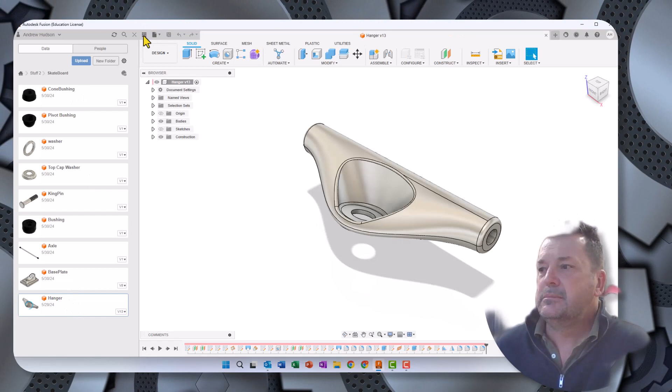Alright, so you can see we've got quite a few things going on here. There's lots of fillets, we've got a loft going on, we've got a rib going down there with fillets on that rib. So there's a fair bit of work going on.

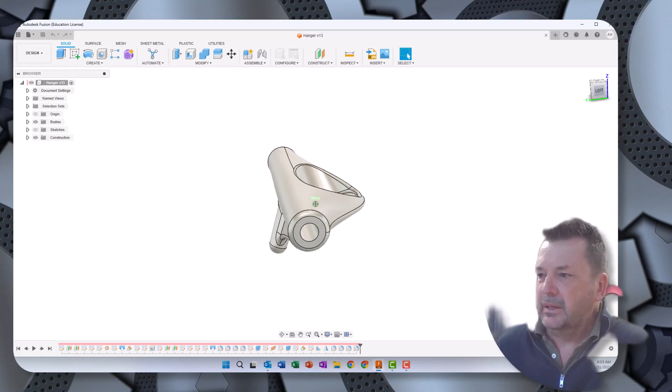Alright, let's see if we can break this down a little bit. Hopefully I've got this right - I actually haven't tested this in the other parts, but hopefully we've got it right.

Alright, so let's wind back the clock to the start of the timeline. First thing was to produce a sketch.

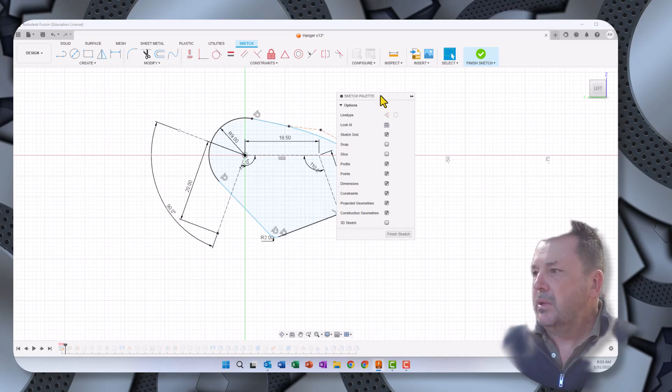So our sketch looks like that. I did that on the YZ plane - I'm not sure whether that really matters, but we'll go from that.

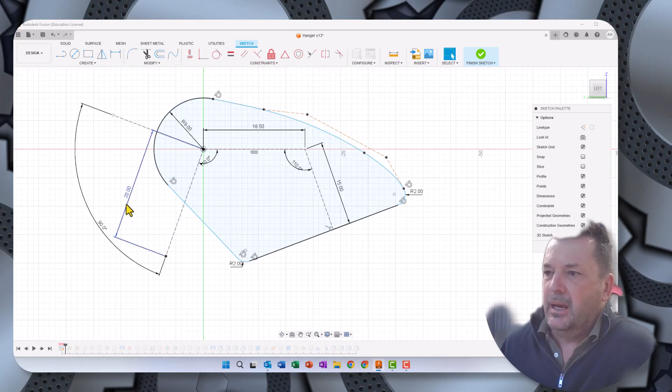Again trying to use your origin point as a reference here, we've got what's called a construction line, which you can pick up over on the sketch palette. So construction line up from the origin point - it's 20 millimeters long, with an angle of 110 between that one and a horizontal line at 18.5. Another one on an angle that's 15 long at 110, so you can place your angles in there. So draw those 3 lines to start with.

From those we've then got a circle that we've put out here. The circle has a diameter of 18, or a radius of 9.

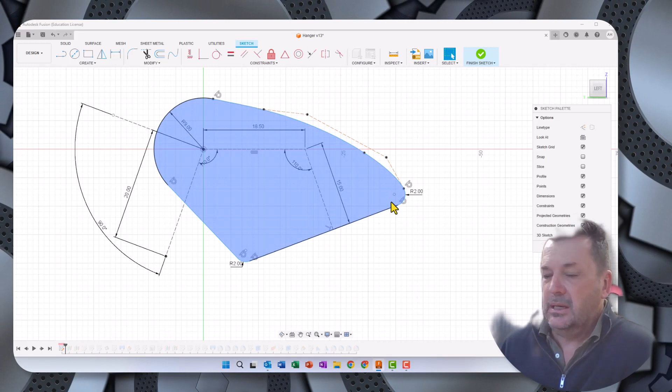We've done a spline going from that across to a point out here, which was just a start point. We've got a radius out there of 2, so you could put a circle out there with a diameter of 4, and then a tangent off that.

So these are tangent constraints here, so tangents off of those. That line there is just perpendicular to the edge of that line, so you can just draw a rough line that's going across - there's no measurement on there.

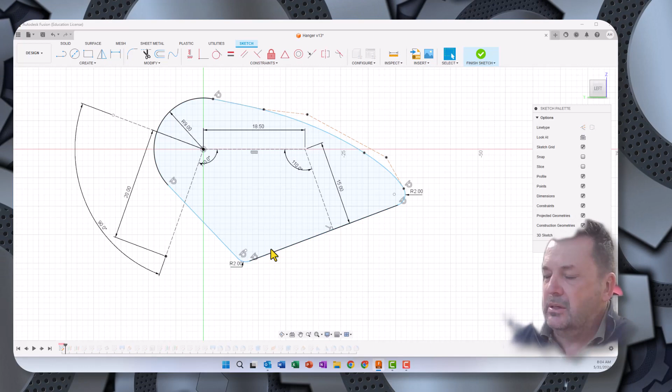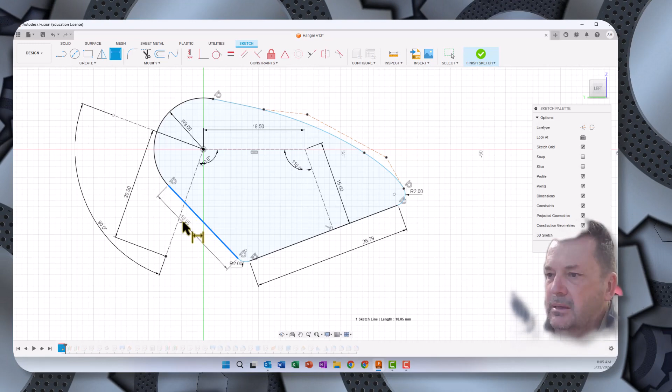We can put one on there, see what it looks like - so it's about 28.79, just perpendicular to this line here. Originally this line here was also just a straight up line, and these corners were a hard corner, and then we would just put the fillets in afterwards.

So pop those in there, again tangents on those, and go from there. Alright, once we've done our sketch, I'm going to go finish sketch and move to our next stage.

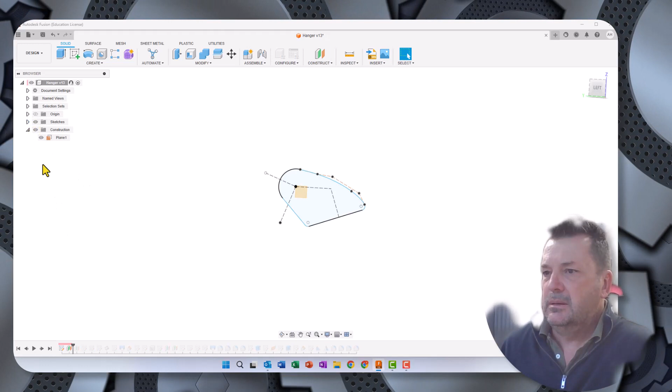We're going to add in a work plane, so this should be plane 1. And I'll put those in there. Let's see - so that work plane is off to the side, you can see it's off.

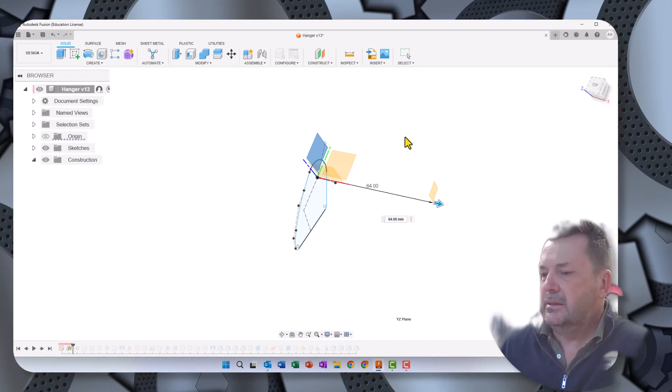It's still on the YZ, but it's an offset plane, so we've gone to construct offset plane and we've offset that. The distance that we've done our offset plane, if I go to edit feature, is 64 millimeters, and then we're going to do one again 64 millimeters on the other side.

So you should have 2 now, 1 and 2, and on those planes they're going to be the ends of those trucks where the axles are going to go in. So that's the 2 endpoints there, and we're going to eventually loft between these 3 sketches. So there's 2 more sketches to come. If we turn this sketch here on, whoops.

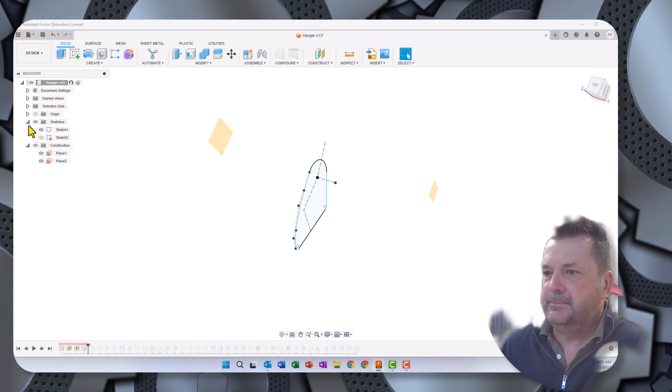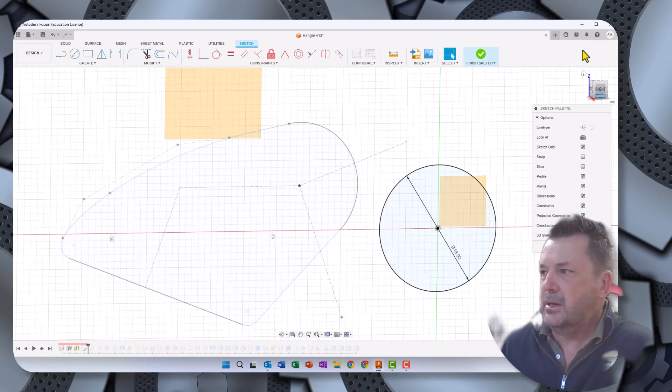So we've drawn a sketch on there. Let's have a quick look - that's an 18 millimeter circle, and you can see the center point of that circle lines up with the center point we did in the original middle sketch. So that point lines up with that point, and that'll also line up with the one on this side. So 18 mil circle on that one, and we're going to do the same on the next plane over. That now gives us 3 sketches to look at.

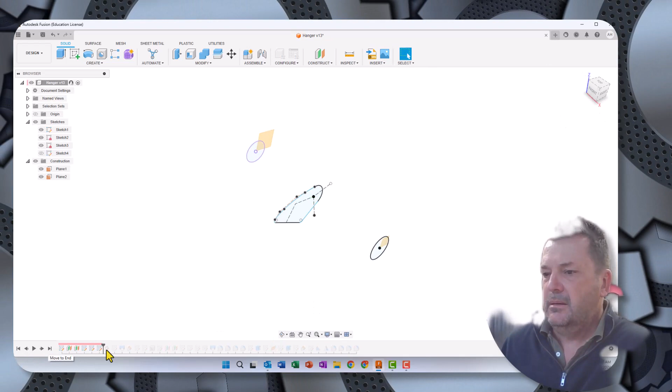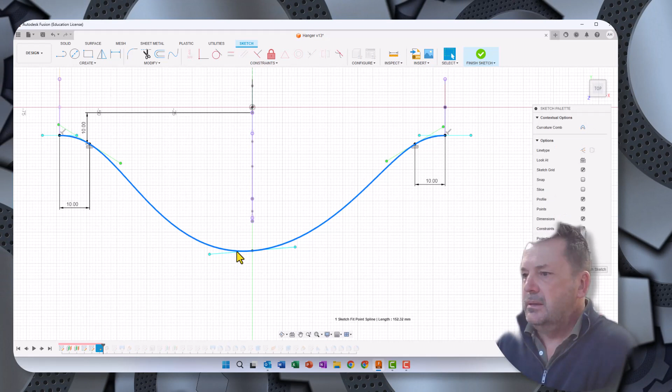Okay, moving along. We did a sketch here. What's on this one? This is our spline. We've used the spline tool, and we've drawn from the edge of this circle across to the point on the front, and across there. It does look like it's not quite symmetrical for some reason - 10 mils to the first point, and 10 mils to a point that's there. It's not quite even. There we go. Okay, hit finish sketch.

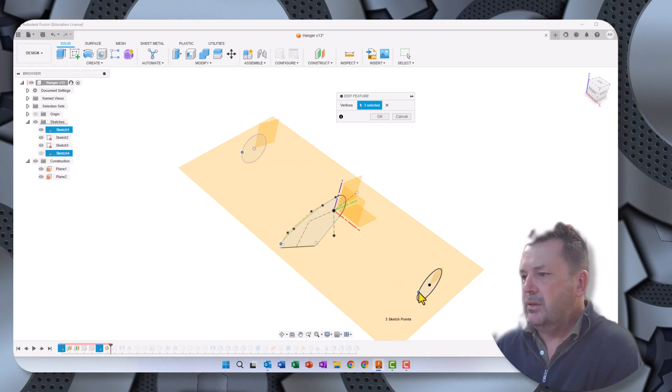Once we've done that, we're going to create a plane. Now this plane was a bit tricky - this plane here is through 3 points. So if I've got Construct and Plane Through 3 Points, that's the one I've used here. Let's see if I can work this out - edit feature. The 3 vertices I've chosen to create that plane are 1, 2, and 3, I think it was. So you can see that plane lines up with those 3 points - a point on the front and the 2 on the ends of the product.

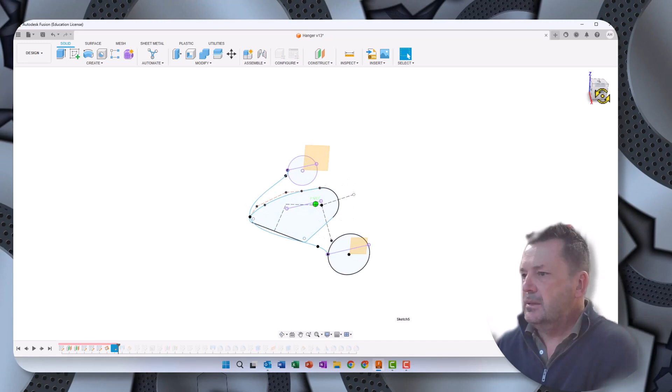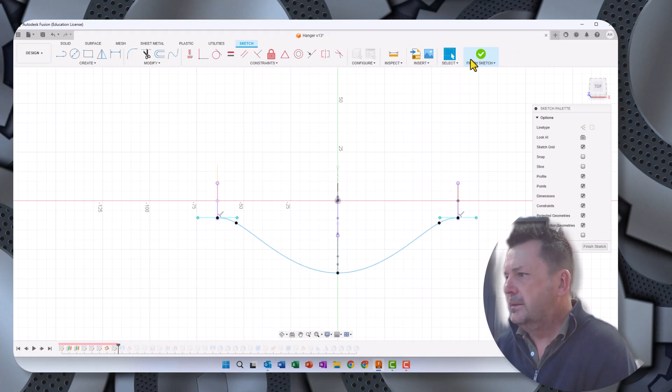Go OK. We're going to do another sketch again. Let's look back there - so this sketch, I'm not quite sure what I've done actually. Let's go edit sketch to have a look. I think it's just to fix up the spline maybe. Oh, it was too - so I've got 2 lines there. So the original spline didn't marry up, so I had to do a second one, I think that's what it was. So let's have a look - got that one, that spline there, sketch 4. I think I'll get rid of that.

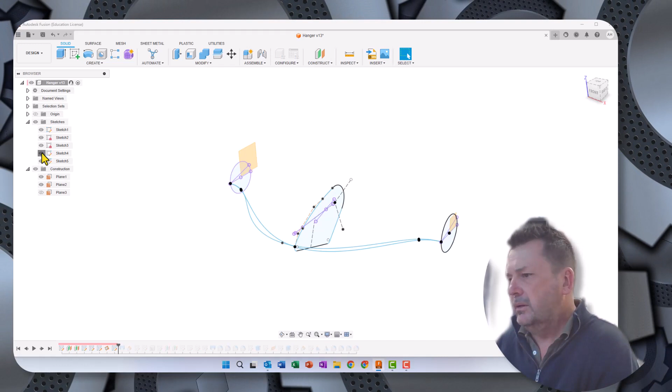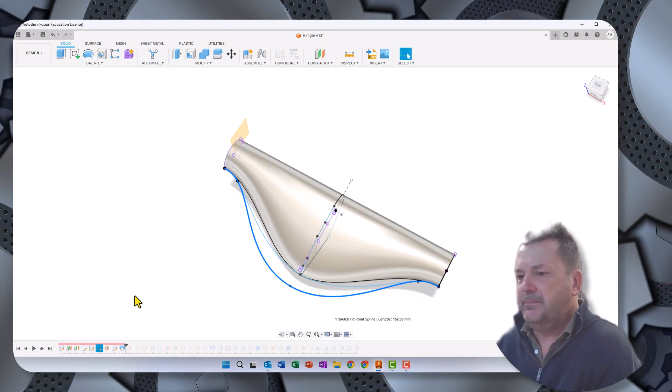Anyway, we go to the next point on, and we have a loft. You can see that it was sketch 4, I think, which is one of these sketches here - I actually end up not using that sketch for our shape. So if we go to the next one across, we go edit feature. This is a loft, which you get from the Create tool, Loft, and then you pick your shape. So if we go to loft, let's go edit feature. Now this also took me a bit of a while to work this out. We're basically lofting from each of the 3 profiles we've got - profile 1, profile 2, profile 3.

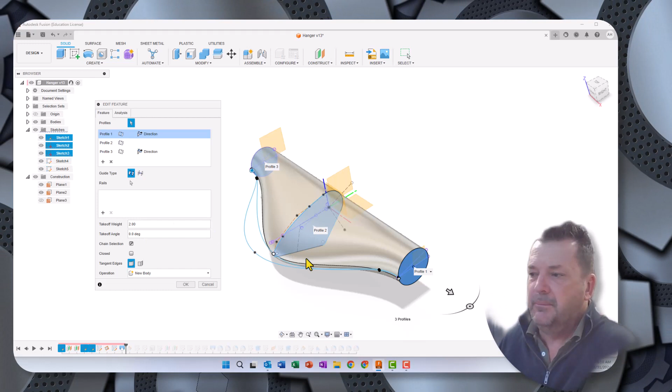When you select the end profiles 1 and 3, you'll need to change it from being connected to a direction. Once you change it to a direction, these options of takeoff weight and takeoff angle will come up, and you can change them. I found my measurements were slightly different to the video I was watching, so I've changed mine to a takeoff weight of 2. What that does is it gradually changes the angle inside of here.

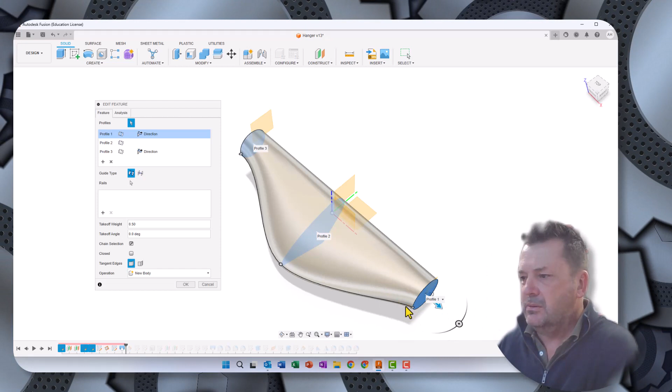Now if I hide these sketches for a second - oops, where have they gone? Let's turn them off. If I was to change the takeoff weight here, you will see the form change. So you don't get a gradual curve in, it will just go straight away, whereas when you change that back out again, you'll get a bit more of a gradual curve into it. So that's what we're trying to do, that's what I did. Once you've done that, go OK, and that'll give you a form that looks like this.

We might stop there for this video because it's about 10 minutes. Get to that point there, and then we'll go for the next couple of steps after we've done the loft.